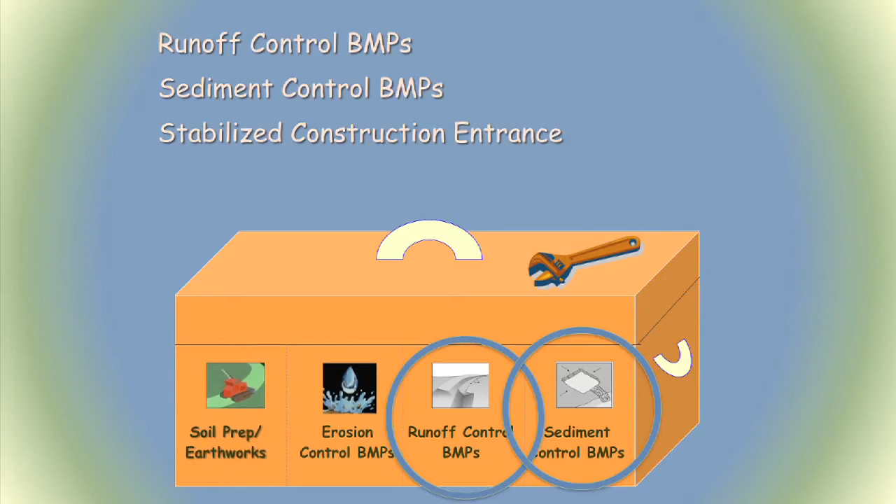Nowhere to run. We're going to talk a little about runoff erosion and maybe a little bit more. So runoff and sediment control, topics that I haven't covered yet.

Remember, runoff erosion is Junior and his gang, and shear stress is how many juniors there are, how thick they are, how much damage they're doing, how much their skateboards weigh, and how fast they're going.

Name some runoff control BMPs - I'll do it for you, I don't work in these areas at all. There are some energy dissipators: rock-lined ditches, overside drains, water bars. I kind of like the environmental opportunities that allow for grass-lined channels and turf reinforced mats.

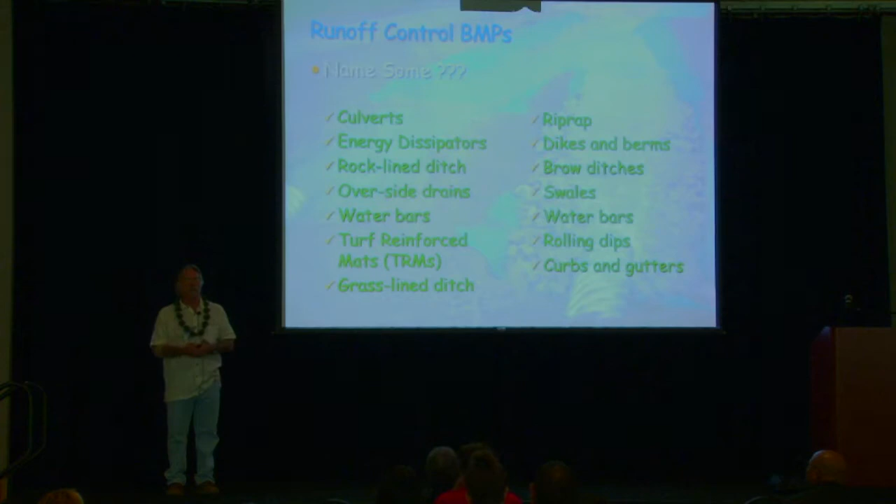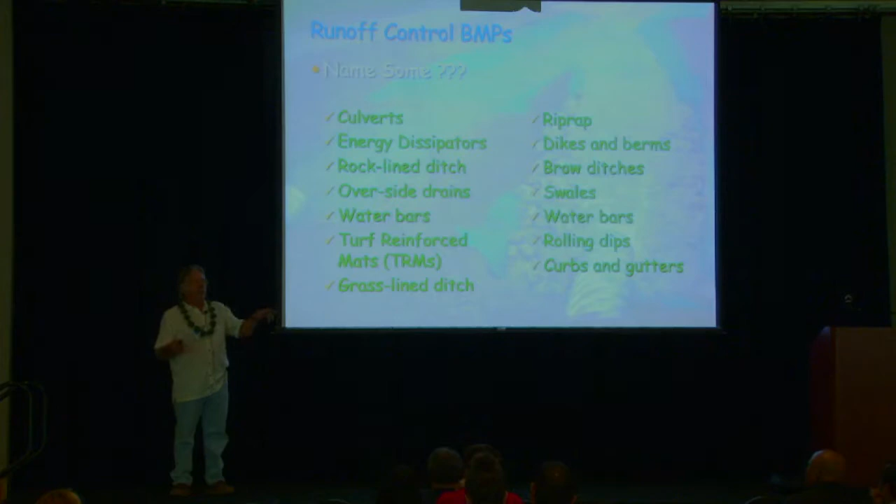I started my work removing logging roads in the Pacific Northwest. There's like 30 miles of logging road per square mile in some of the watersheds I've worked in, which are very steep watersheds. Every tree harvested out of the Northwest had a bulldozer hooked to it to pull it out of the woods, so you can imagine the amount of roads leading to pulling the lumber out, and then they just left the roads. The alterations to the hydrologic hill slope drainage patterns were tremendous, and all of that sediment is being delivered.

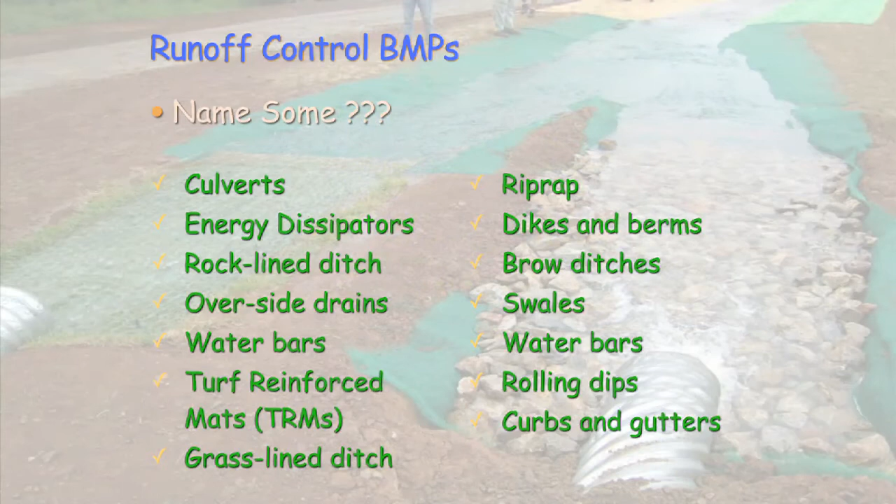Dikes and berms, water bars, rolling dips - I like rolling dips, water bars I don't like. Curbs and gutters, you know, I'd save my plastic on that. But runoff can be very, very serious, as you see here.

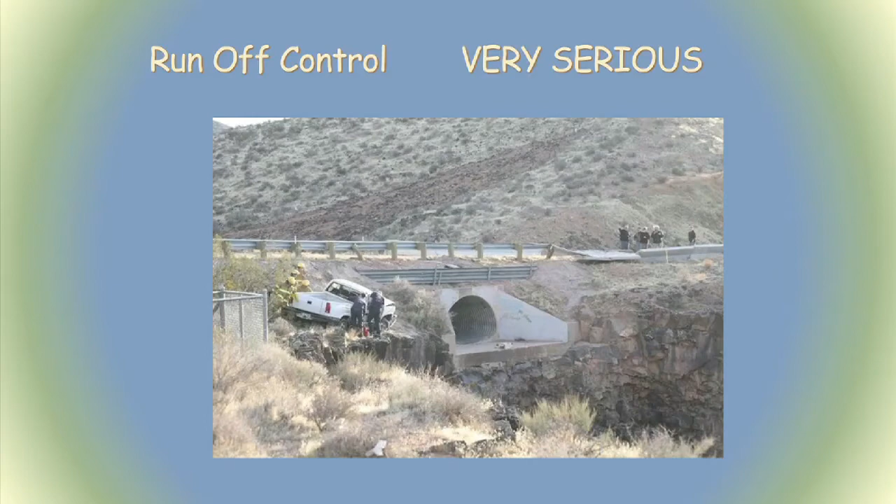I wonder if highway departments build roads like this - this is in New Mexico. They build roads and drain an entire arroyo or whatever, a big giant area, into one culvert. And it's very serious, causes big erosion. Look at that.

Now, I don't know what this is from, to tell you the truth, but look at this guy. He obviously went through - he must have been drunk, maybe not drunk, somehow impaired. Very lucky though. He went through the guardrail, bounced over here, turned out here, and did not turn up down there. It's a good time to go to Reno, huh?

Now, I'm not sure that gully existed before the highway department ever built that box culvert.

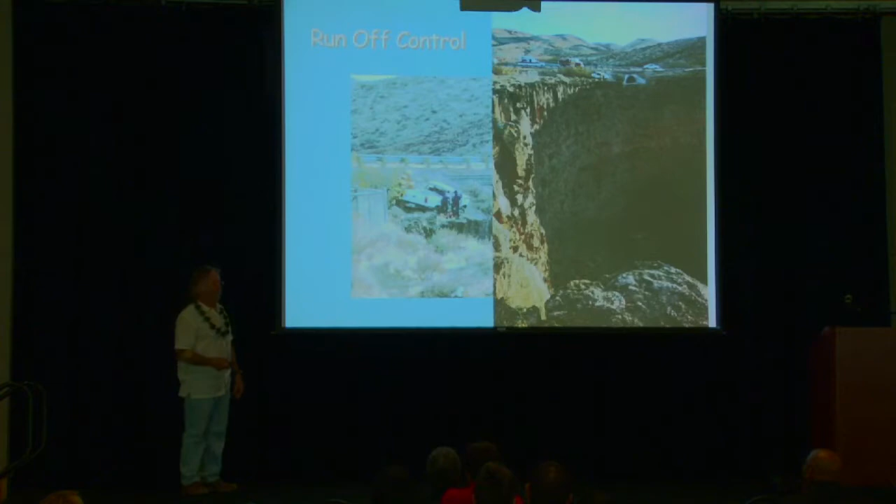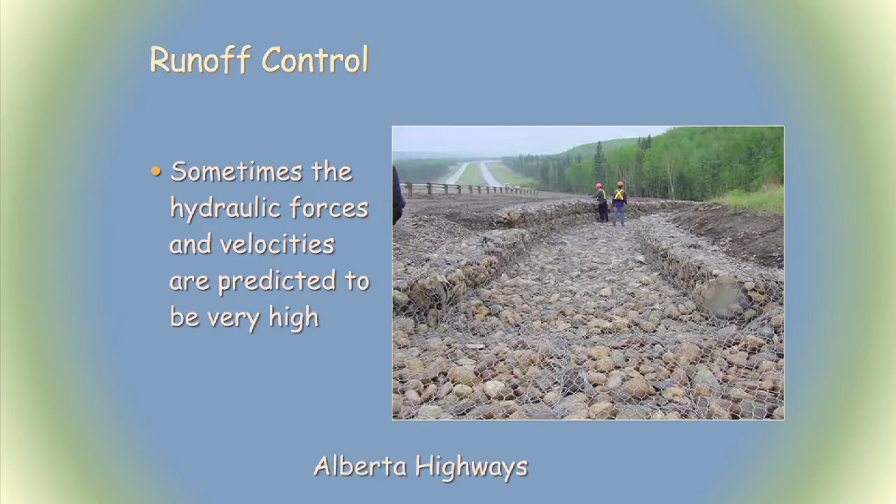Sometimes you have to use gabion baskets, but gabion baskets - these things last, studies have been done, they last 15 years now. There's abrasion and corrosion; they have zinc coating, most of them. If you put the polyplastic coating on them - there you go, plastic again - you get another 7 years out of them. But if they're abraded, they could be failing.

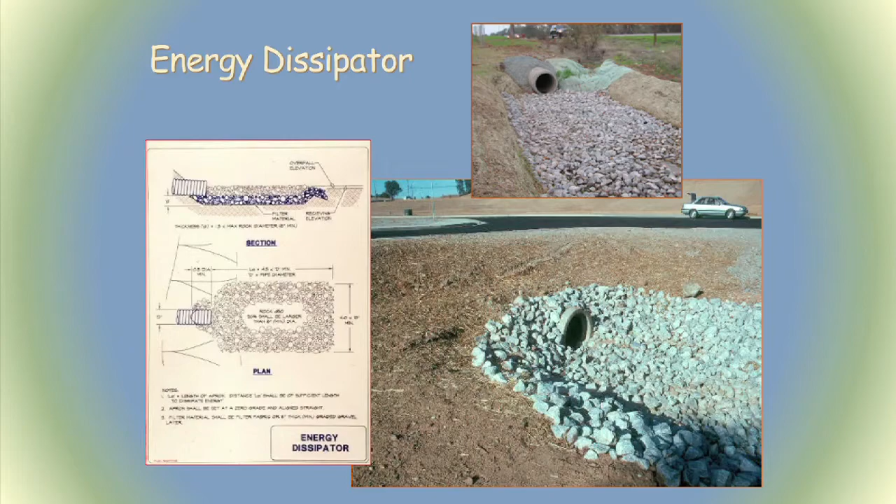You generally use gabions because all you have is little rock and you don't have big rock, so you have to encapsulate the little rock to make it act like a big rock. Overside drains are energy dissipators for the outlets of your pipes. I have an alternative, but it's plastic - it's HDPE. I want to show you that one, it's on this one here.

Nothing like a devil's advocate to make me think. Thank you very much, that was good.

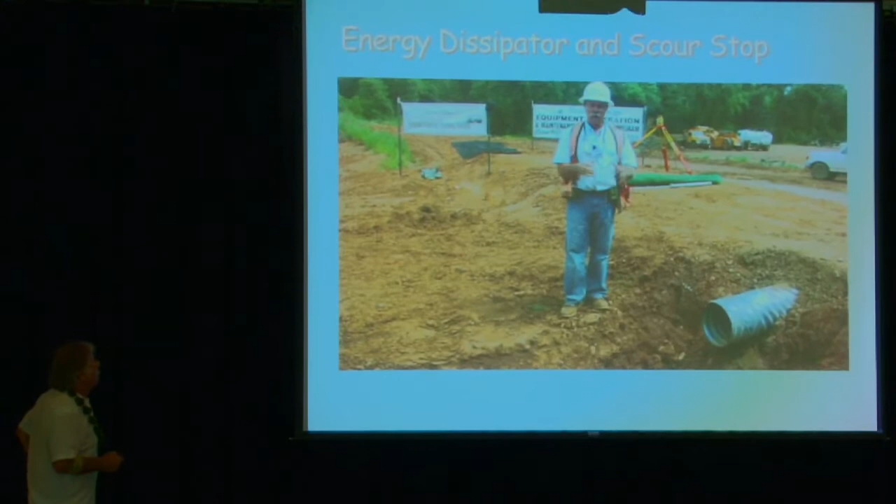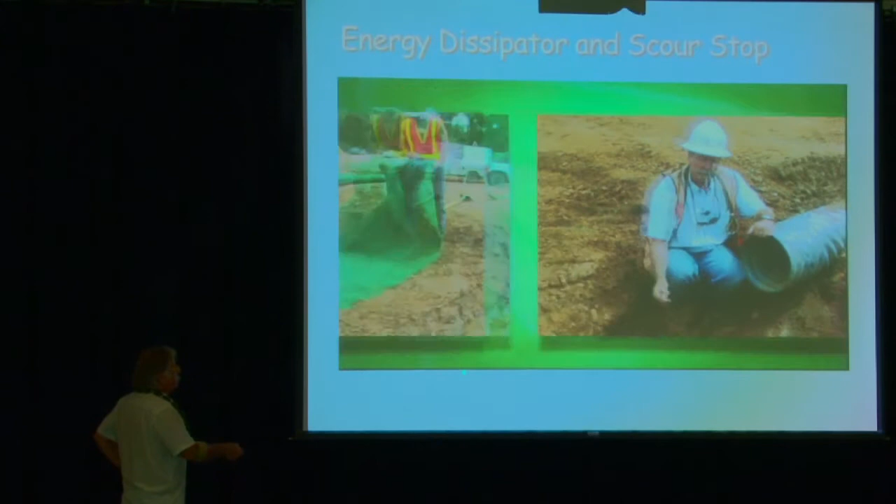By hitting the rock, the rock provides so much roughness. We've excavated down here. We will cover this with a really high strength and permanent turf reinforcement mat, and then we're going to lay our rock apron on here.

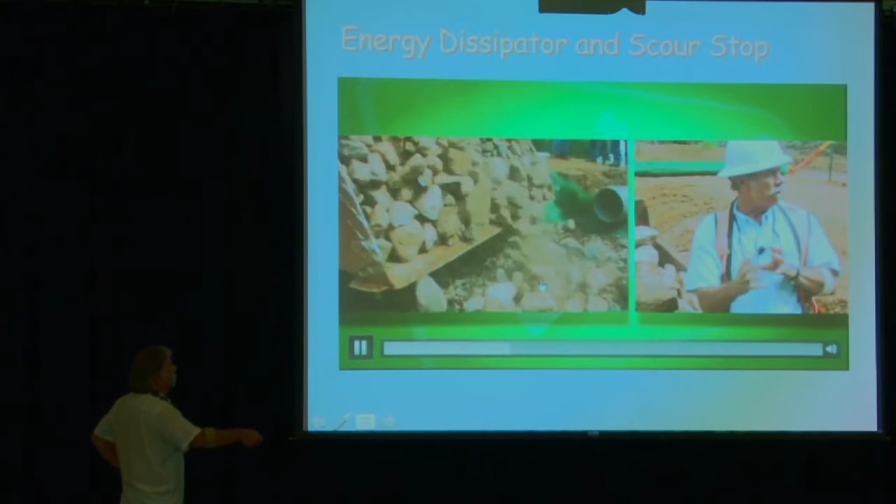Right about here, Matt. Okay, so before we put our rock energy dissipator down, we're filling it with rock, a little bit more. So what we have here is - okay, so it's much stronger. The whole becomes stronger than the individual piece.

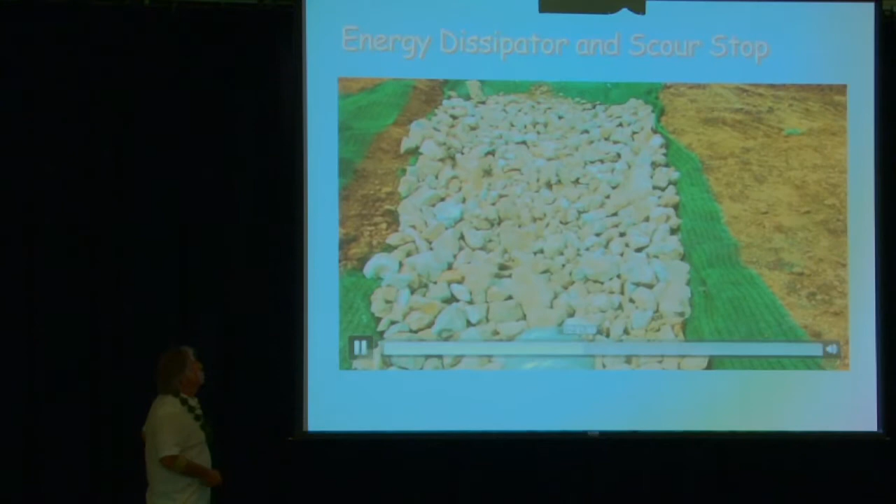The next thing we're going to do is we're going to change gears. So that's a typical energy dissipator, rock with an underlayment to energy transition. The scour stop is made out of...

HDPE, it's a high-density plastic. It's much lighter than concrete. These are very light sheets to put down. They're 4x4 sheets, and we put these down and replace the cement apron.

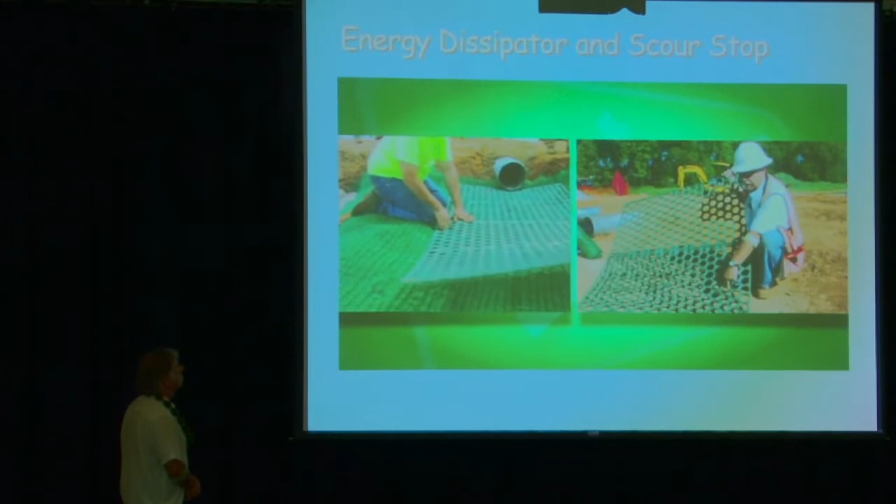The scour stop apron down, and then we just anchor it in place. They have some really cool new patented devices for anchoring these things that make them really, really easy to anchor. Now pause for a second. So, and then you - if you can imagine now, let's put on our post-construction, where's Rich?

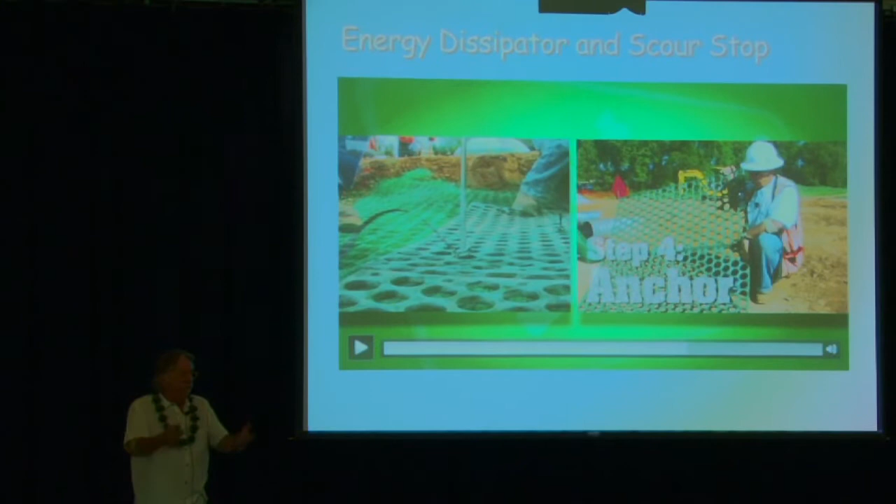Put on our post-construction hats, where we're trying to get more water to infiltrate. We've got enough developments. So what about if you had a ditch, a culvert that drained a subdivision down into an area where we could put a scour stop? What if I decompacted the soil and made the entire ditch capable of handling 20 feet per second at times, while at other times it has low flows and absorbs all the pollutants?

So I dig down, build engineered media for the bottom of the ditch, put the turf reinforcement mat down, then the scour stop, which has been tested at 20 feet per second. It has openings in it, and you grow perennial grasses native to the area with large, long roots. Then it outfalls into an area with a TRM that also has native grasses with deep roots. So during first flushes and low flows, all or a lot of the water will infiltrate - we maintain high infiltration rates, while at the same time having 20 feet per second flowing through. That's what these kinds of techniques allow us to do.

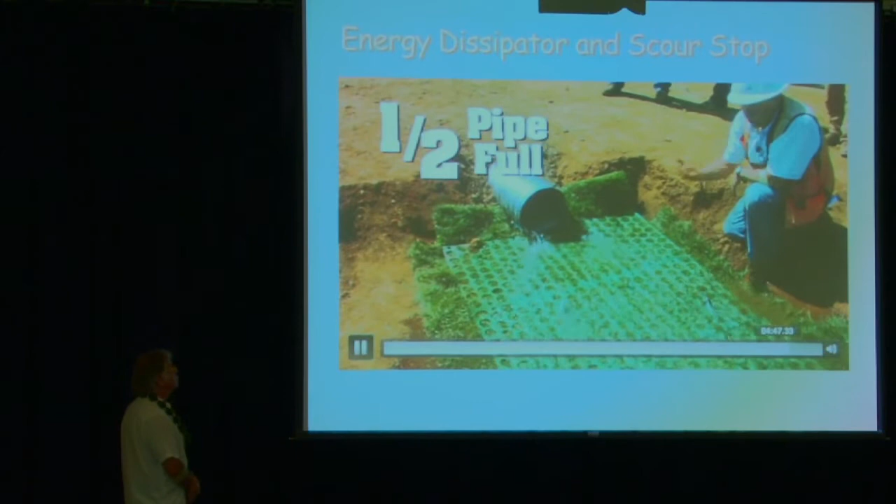Spread out, it's more laminar flow. Give it half, increase the velocity a little bit, see what's going on. Again, there's no real turbulent flow, it's laminar flow. Go ahead and crank this thing all the way open - let's see what we got.

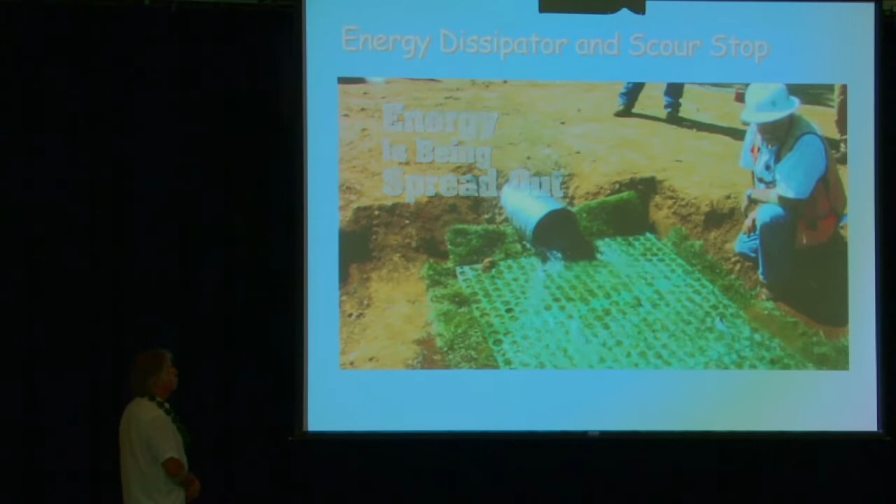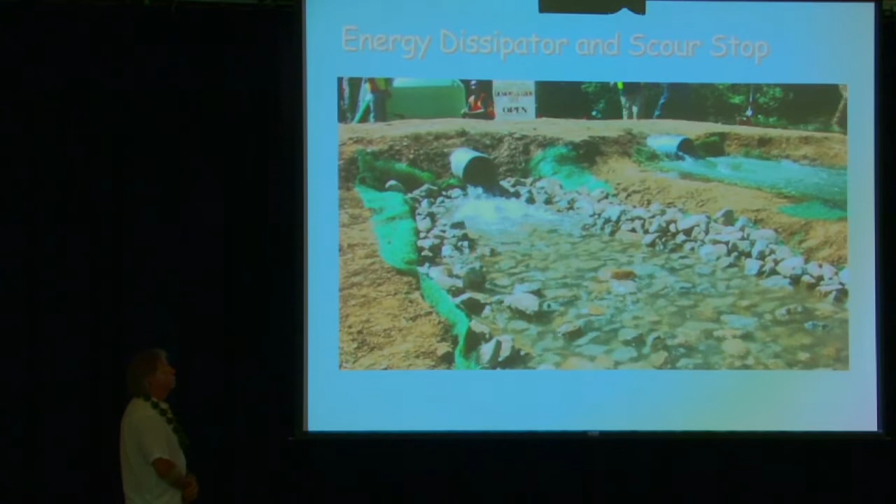Okay, take her back to a half a tank, and let's have a half out of the other one also. Let's run them both side by side. So those are two ways you can do outlets to culverts.

Also, Alberta DOT is using the scour stop as down drains, and again these can be vegetated with native grasses.

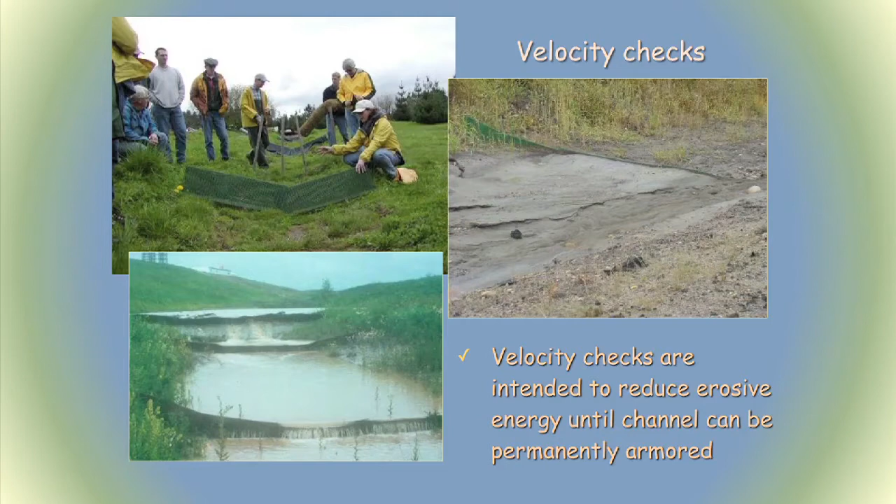Other runoff control - there are velocity checks you can put in ditches to slow the velocity down. But once you build a check dam in a ditch, you're going to have some erosion. Check dams are an anomaly in the stream system, so you want to be very careful that velocity checks are very low to the ground. Here's a shallow, low gradient median strip in Redding with no high velocities anticipated, so they're just using grasses.

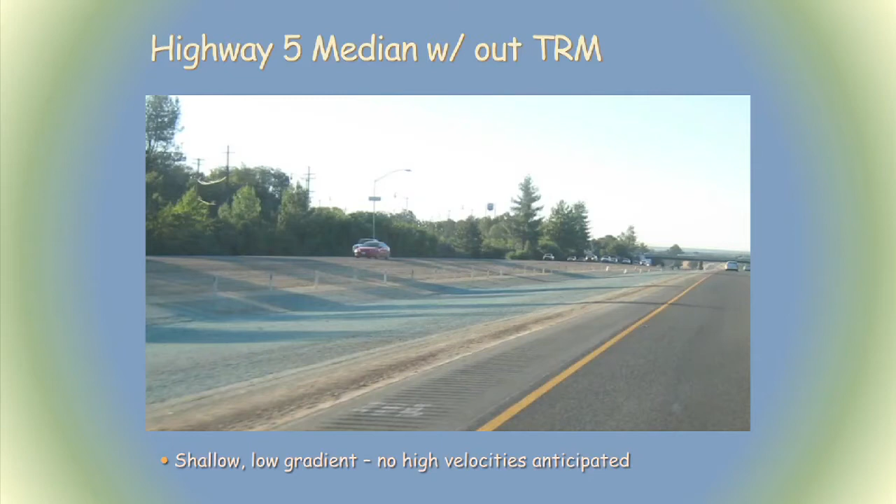This one, I'm sorry, you can't see it - the fiber rolls were used across this ditch and they blew all over. They should have used the rope and twine method to anchor them.

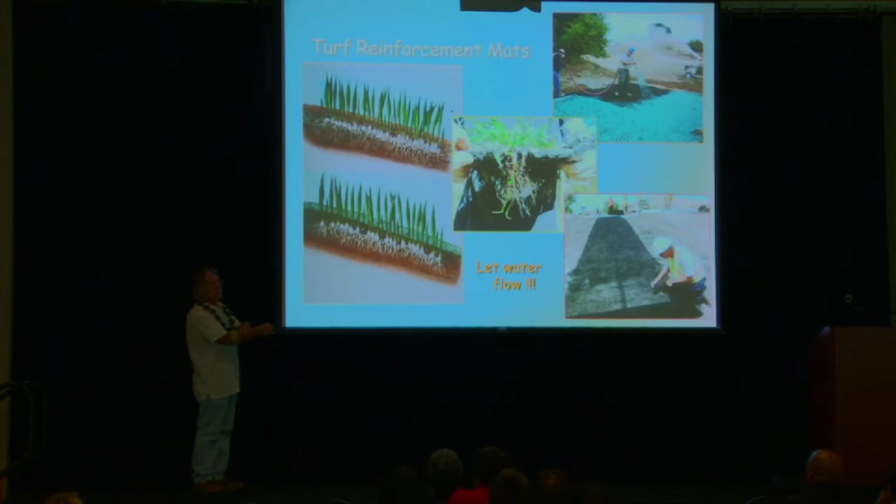So this TRM, the Enkamat right here, we sprayed it down at this off-highway vehicle park, and then I had to remove this piece. This is only 2 months old. So this is the piece that can now withstand 21 feet per second, higher velocity than articulated concrete blocks. At 21 feet per second, articulated concrete blocks start lifting, going through and vibrating, cavitating - and this will last longer than that.

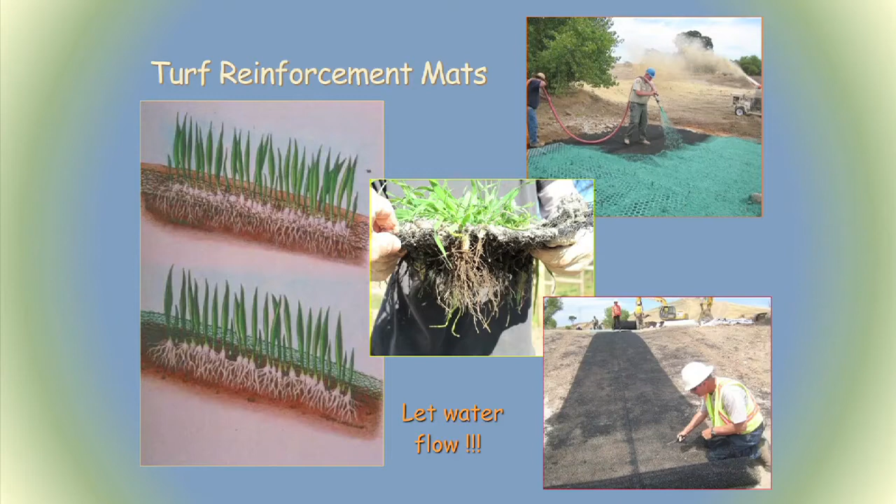So high velocities can be had. Kind of exciting - this is Enkamat back in the day, '94, the first time I ran into it, using native material with it.

So the idea with a lot of TRMs is you want to use them until you can get the grass to grow, right? You don't want the ditch eroding until the grass gets established, so you need something to protect the ditch. Do you need to use plastics? No, there are biodegradable materials now.

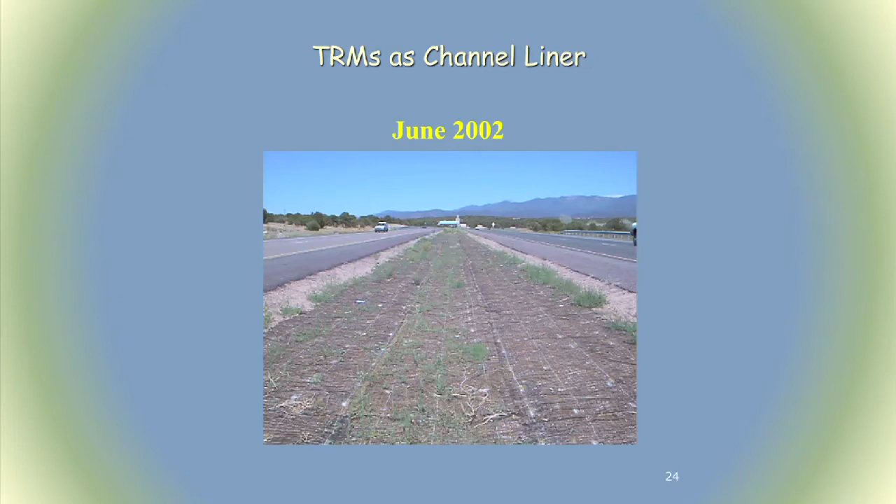Here's a median strip. This one isn't using a biodegradable - this actually is coconut, but the netting is plastic. But then the vegetation grows and you're done.

I told you already, when you put your TRMs in, make sure that at 20 feet you have a check slot or a double row of staples. That's critical to have these things working properly.

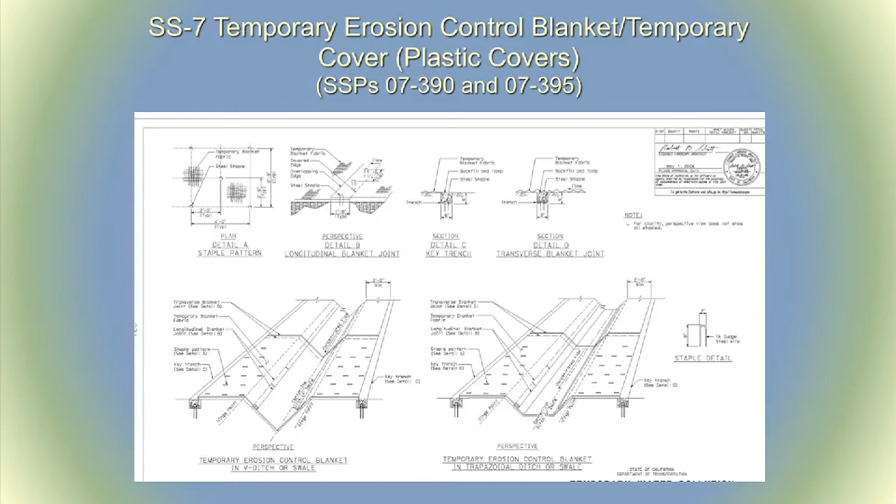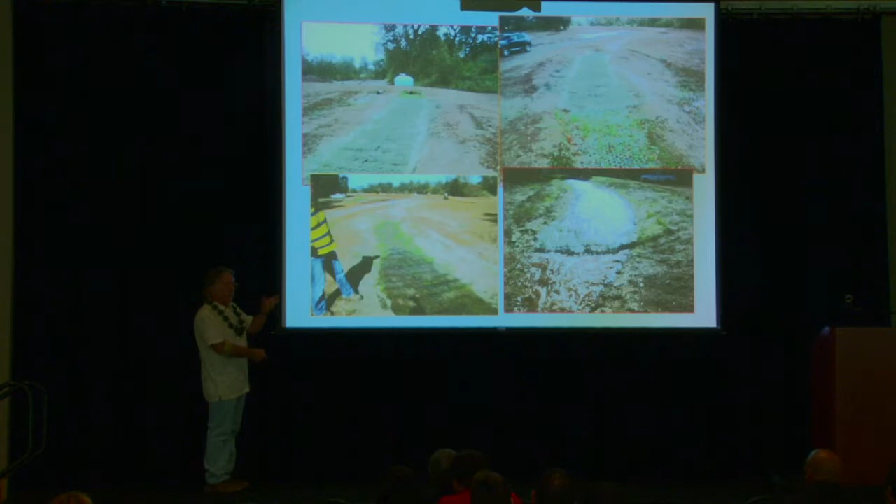You can see where the protection - I told you I lined the ditch to be fair at Shasta College. We had a very hard clay soil, and to make it look right I put 6 inches of decomposed granite, highly permeable, with a maximum permissible velocity of 2 feet per second. So once it exceeds 2 feet per second, it erodes. And yet we were able to protect even that granite with the blanket. This is where the protection stopped, and it eroded the 6 inches of granite.

Articulated concrete blocks. In my community, instead of having culverts, we've been doing some of our stormwater practices as removing culverts and going back and doing areas that can receive more stormwater. So these are post-construction BMPs.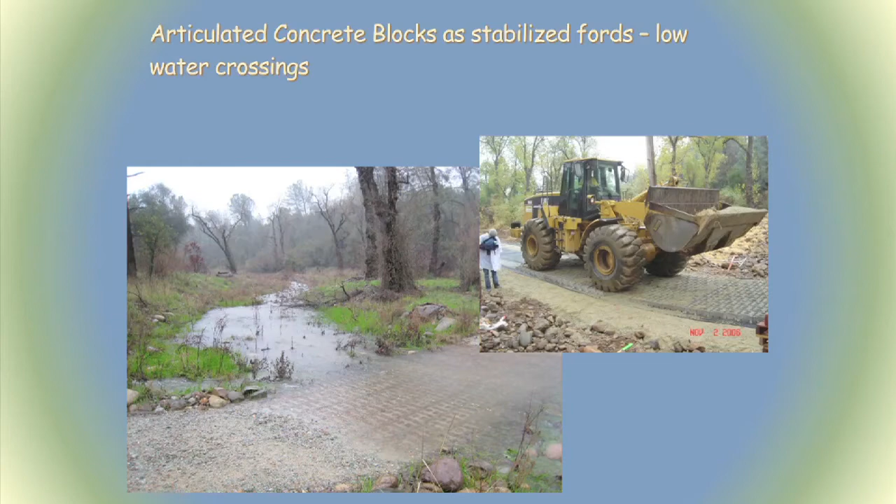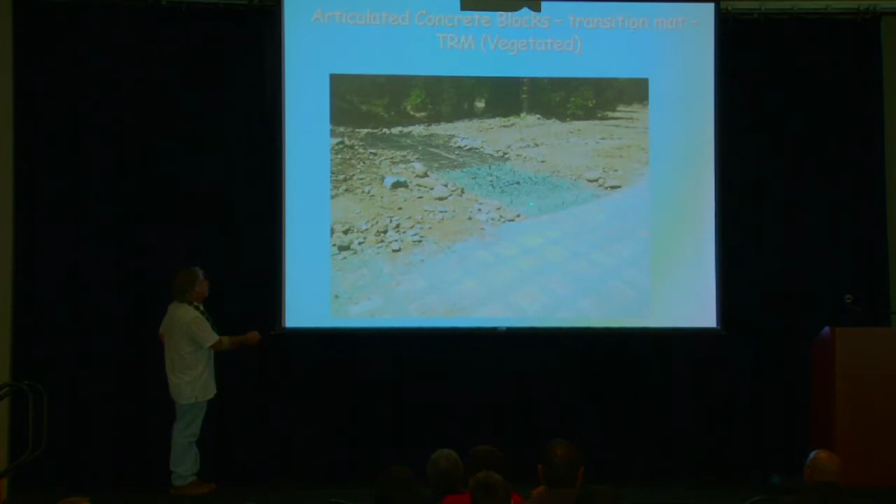Here's one where I replaced a culvert with an articulated concrete block, draining so water can go in between the blocks. It can go on the Enkamat and then the scour stop, and then we have Enkamat with native grasses. And that's the way it looked when it was built.

And then it withstood several high flows. It withstood that high, 8 inches in 4 hours of flow. Look at that. And after that big flood, it's still in place. We have native grasses now holding everything together. This is 7 years later, and that's still in place.

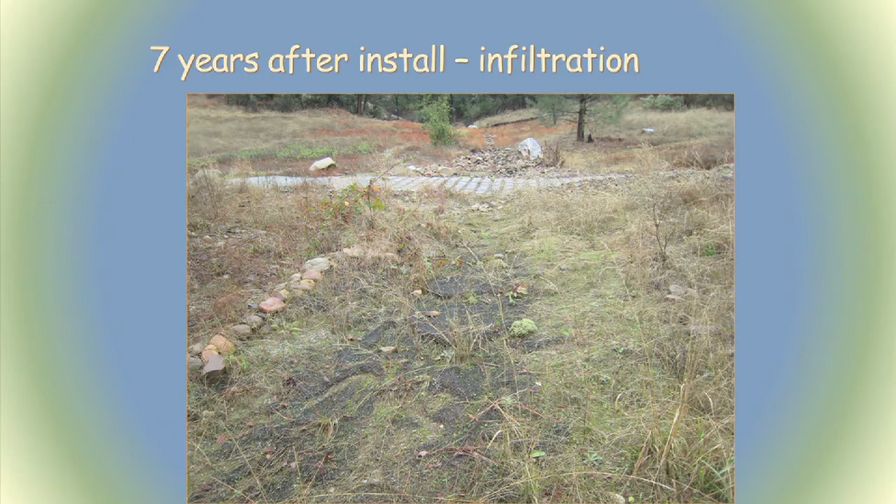Let's talk about sediment control BMPs a little bit. Are you all familiar with Stokes' Law? Anybody raise your hand if you know Stokes' Law. Stokes' Law says that sediment will settle out of suspension based on its density, particle size, and the temperature of the water.

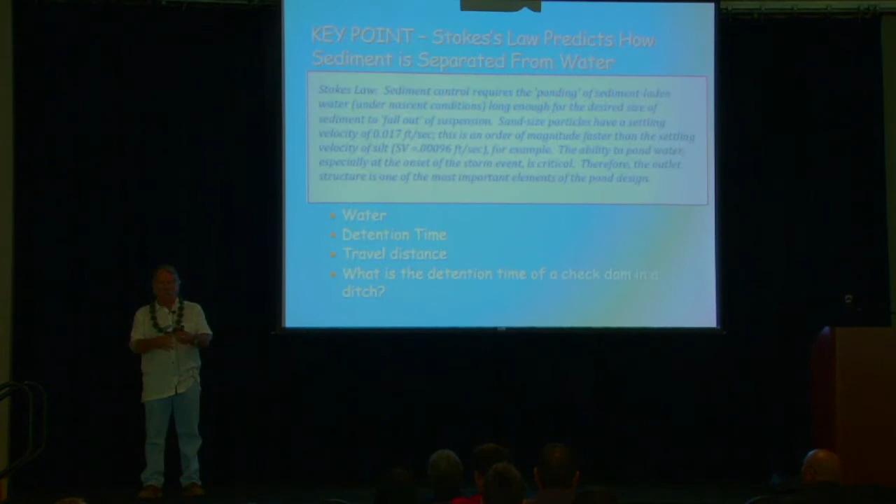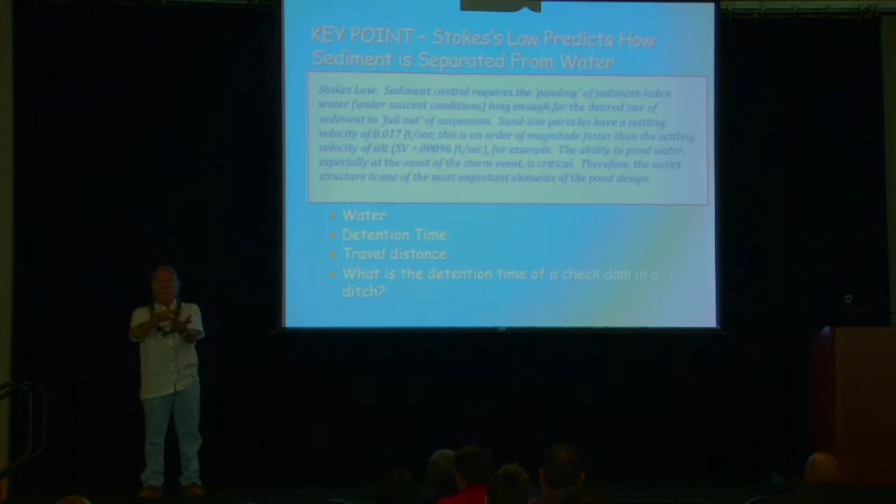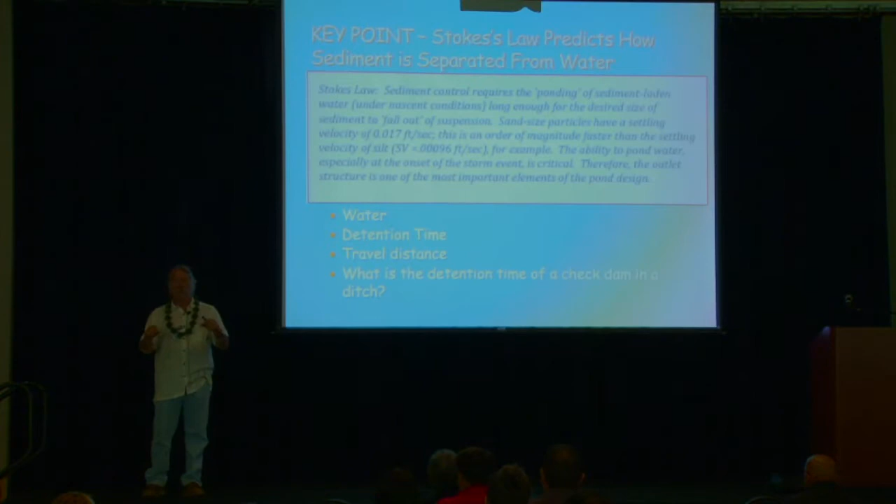So if I had a little water bottle here and I put some dirty dirt in it, added water, shook it up and set it down, what's the first thing that's going to fall out of suspension? Sand, then maybe after an hour or so, silt, and maybe never clay. It depends on which kind of clay. Some clay particles actually have a negative charge, so when they come in contact with each other, they repel each other. They're like two negative ends of a battery. They repel each other, and those are the ones where maybe we need some flocculants.

But the critical thing is it doesn't say anything about filtering. It says that you need a pond. So if you're really going to do sediment control, you need water in your pond, and it needs to settle out. You need water, you need detention time, you need a travel distance.

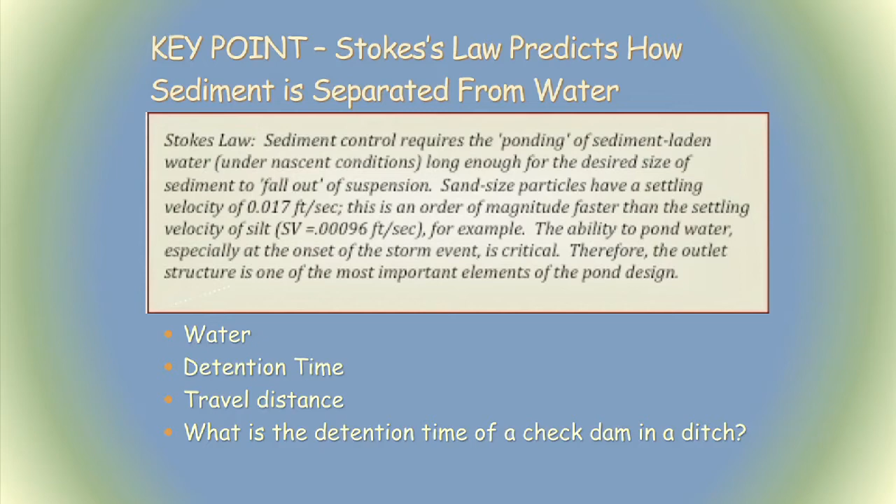So, say you had a curb, and you had two gravel bags in the curb, and muddy water's running during the storm, muddy water's running down the curb. What's the detention time of the water behind those gravel bags? And how effective are they?

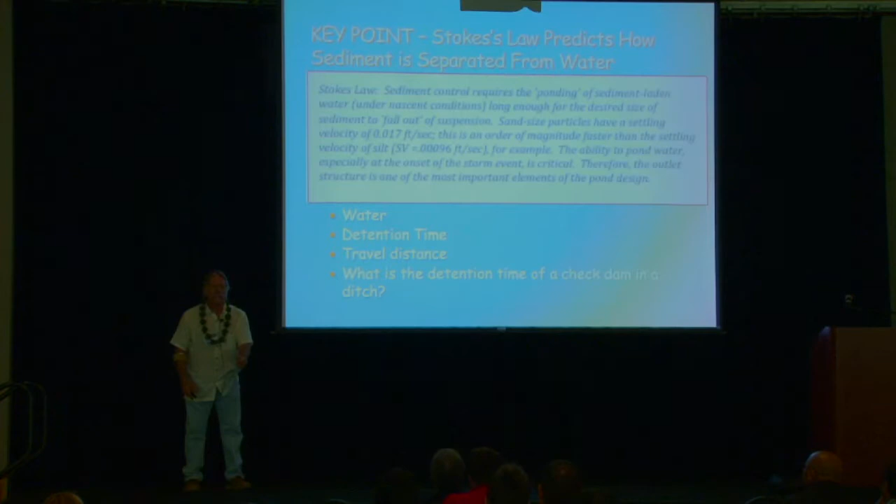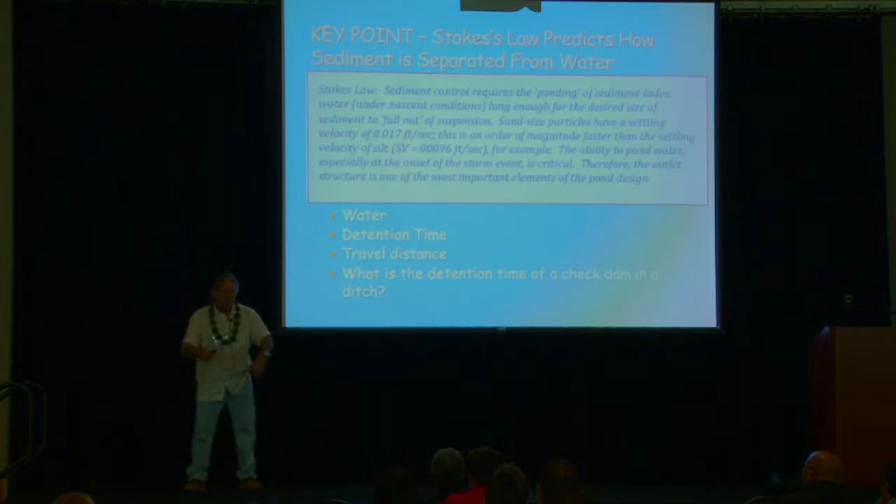During the storm event, at the peak of the hydrograph, it's rising, and now it's flowing full speed. That sediment is going in there and it's going out just as fast as it comes in. But maybe on Saturday morning you come by, and at the tail end of the hydrograph, the last little bit can't get by and it traps it.

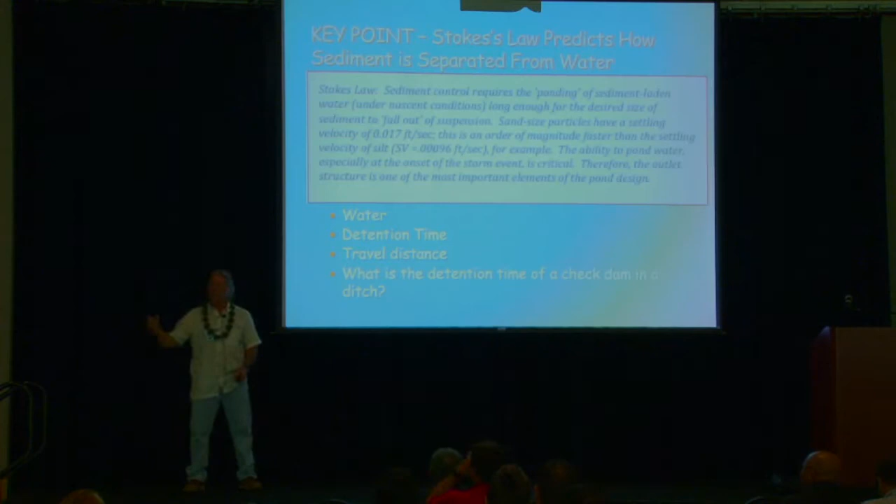So you get a shovelful after the storm is all done, and you go, wow, these things work great. I get a shovelful here, a shovelful there. But what you didn't know is that you had 100 or 1,000 cubic yards going through the system, and you didn't know it was there.

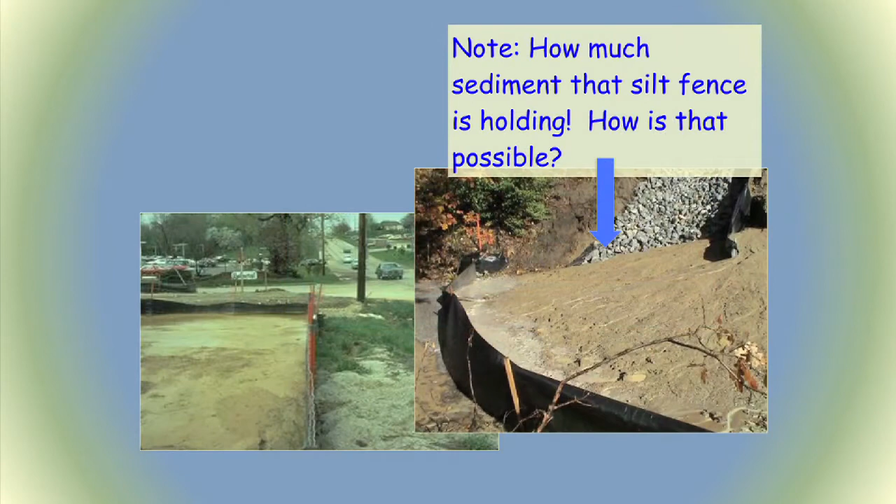Silt fence with a catenary curve versus a silt fence that went around the perimeter of one acre, directing all the water into one acre. Would you ever design for me a sediment pond that held one acre where the embankment was made out of sticks and cloth? It's silly when you think about it.

We could have taken a bunch of catenary curves here and trapped this in a bunch of different spots, using even less silt fence, if we'd just done a couple of these kinds of things. And we directed all the water to the low point of the site, where there's a storm drain right there.

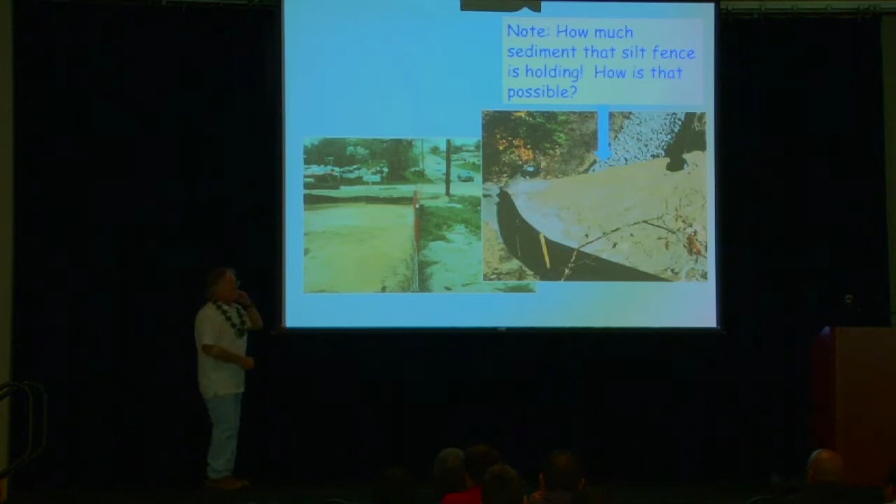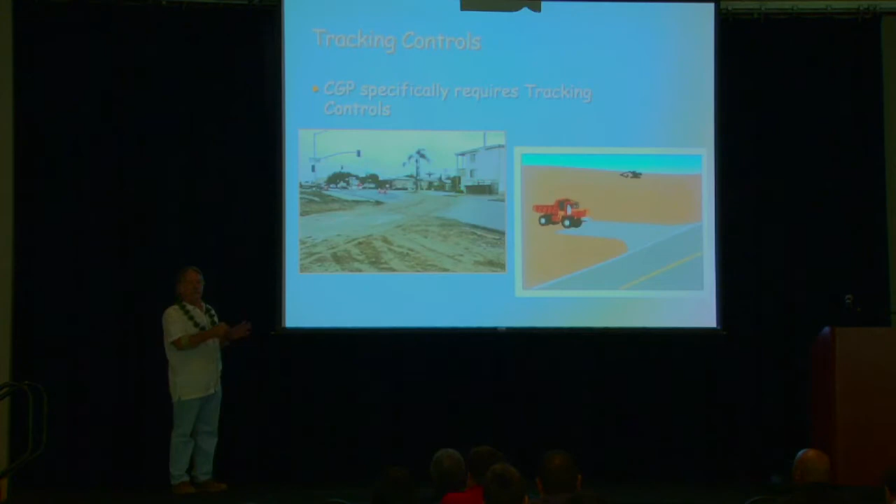A little bit about tracking controls. I said I would talk about it. Are tracking controls important here? Are you having to do tracking controls? Yeah, okay. So basically what we have for tracking controls, and you probably already know it, is we have a rock apron, or we have nothing. And that's a good way to get called, because the Clean Water Act just loves to act on complaints, and that's a good way to get Aunt Josephine and Uncle Bob to call in when you leave mud on their road, and then it turns to dust in the sunny afternoon. So we've got to do something.

A 50-foot rock apron is one way of doing it. My experience has been with a 20-foot rock apron, and it could work if the rocks are angular enough. It's tricky, they have to be angular. If you get a lot of 6-inch rocks, they can get caught between the dualies of the truck and get tossed out on the roadway. So you need a lot of 4-inch angular rock. I tried it with subangular rock and it didn't work very well.

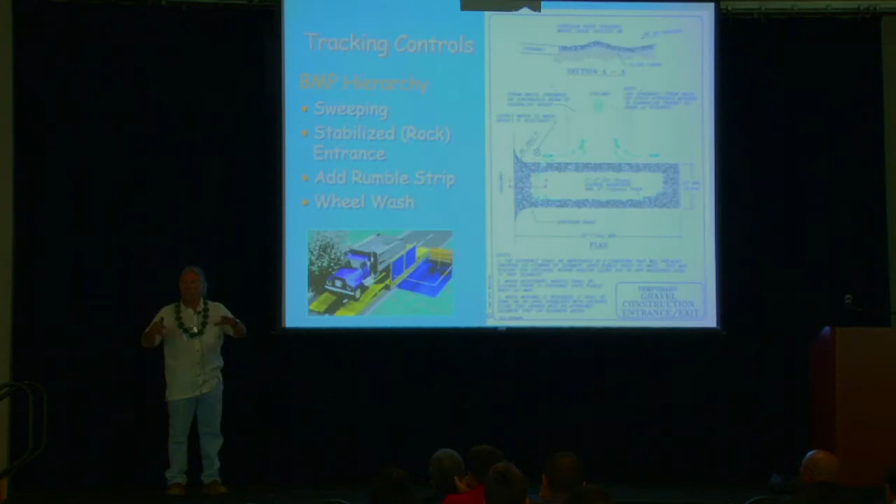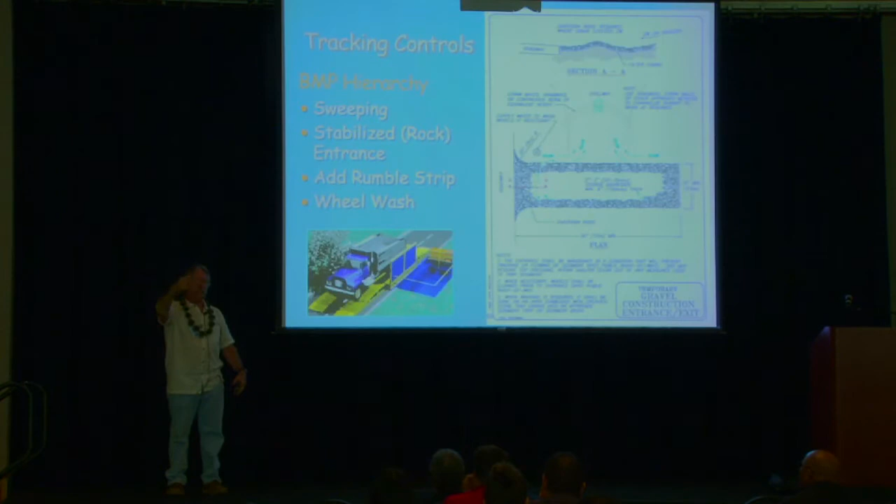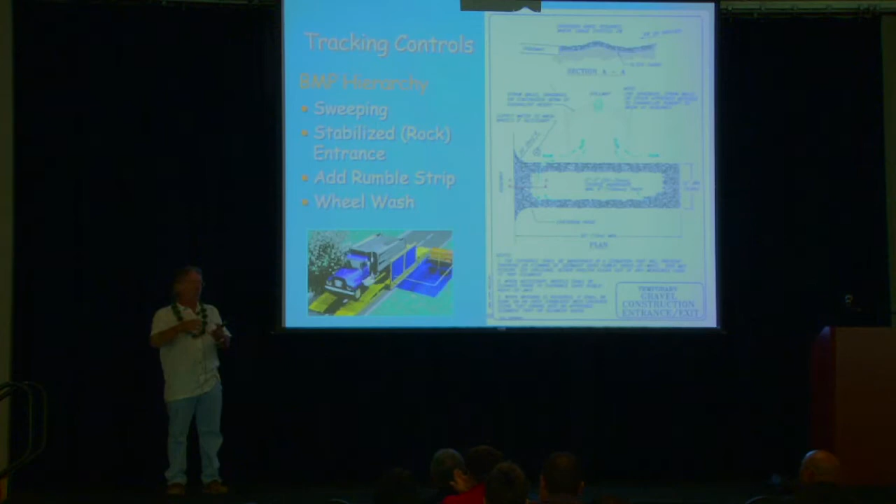What I like to do, and Caltrans has found this too, is the contractor lays the geotextile down, lays 6 inches of rock down, and it doesn't take long for that to get filled with mud. Then what do you do once it's filled with mud? You go back to the highway department and say I need another one, and you're paying $1,100 to build it. So where does all that plastic and rock go? They have to haul the old dirty one off to the landfill.

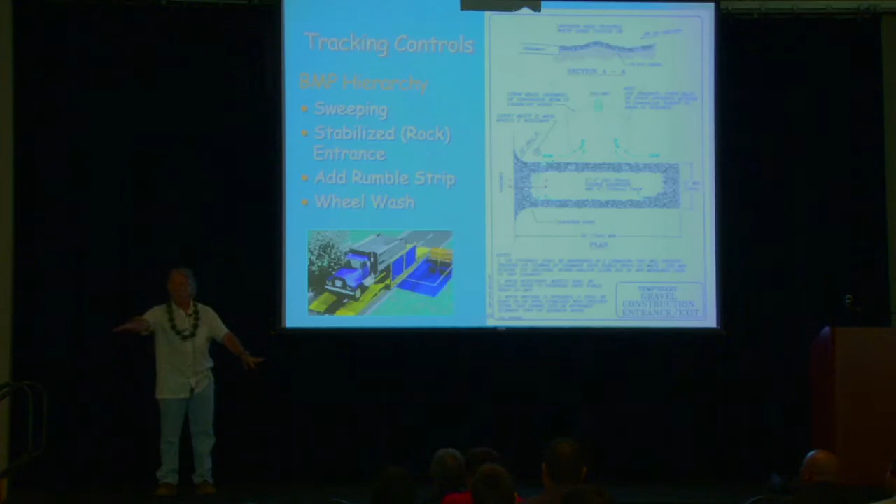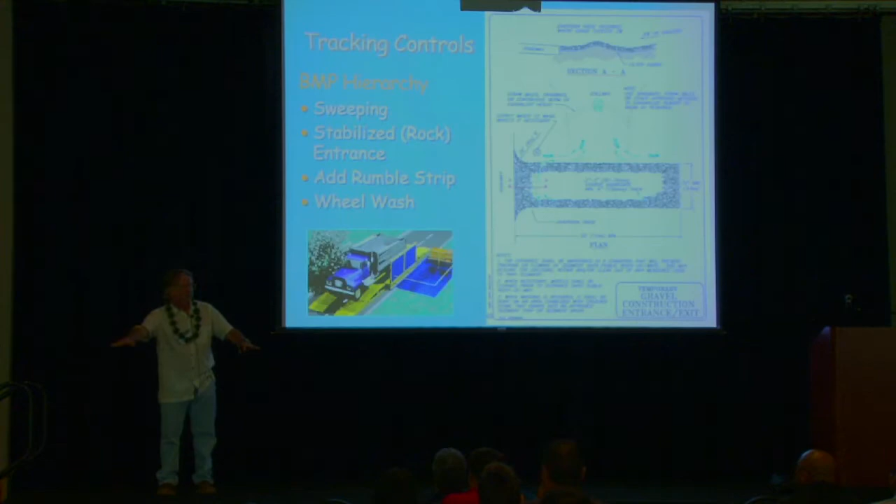So what I'm saying is: if you want to be environmentally sensitive, follow the specs that they actually have on these things. Make sure your contractor digs down 6 to 12 inches into the subgrade, and make sure your subgrade drains to a point that's not the road or not critical. Then you put your geotextile down. If a storm comes, it drains out through the geotextile. Then you fill it with 12 inches of rock, or 6 inches of rock, and use it. When a storm comes, it washes the rock and drains off into a place.

You can direct that drainage into a small sediment pond. You can use Filtrexx socks, build a little embankment, or use silt fence—you have your own little sediment pond there. Now, it gets plugged up really bad, so you park on it with a water truck and wash it out the drain, and then you reuse it.

Don't pay $1,100 for the second one. There's no incentive for the contractor to make these things work if you're going to pay for the second one, the third one, and the fourth one. If the rock doesn't work, you bump it up a level—you should always have sweeping available—and then you bump it up, you put a rumble strip on it. The same thing goes with the rumble strip.

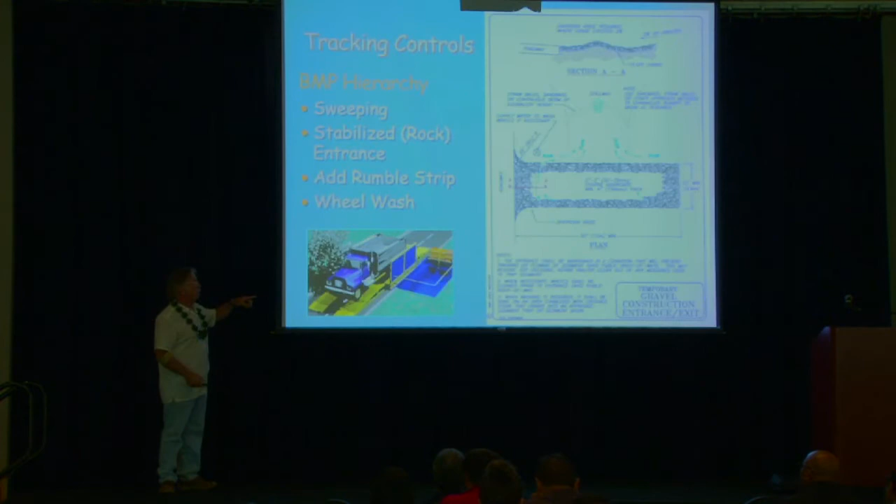You want the strip on an angle so they drain and wash off into an area you have some control over. And if the rumble strips don't work, then you have to do the wheel wash? Caltrans had to do these on some really critical sites down in Orange County, and that could be really costly.

So there's a rumble strip, draining off into that area—we'll hope that's some kind of drain area. A little piece of rumble strip like that might not do much, but you can see where it drains off to over here.

You want to play this video? And I'll have you fast forward as we go through. How much time do I have? Five? Okay.

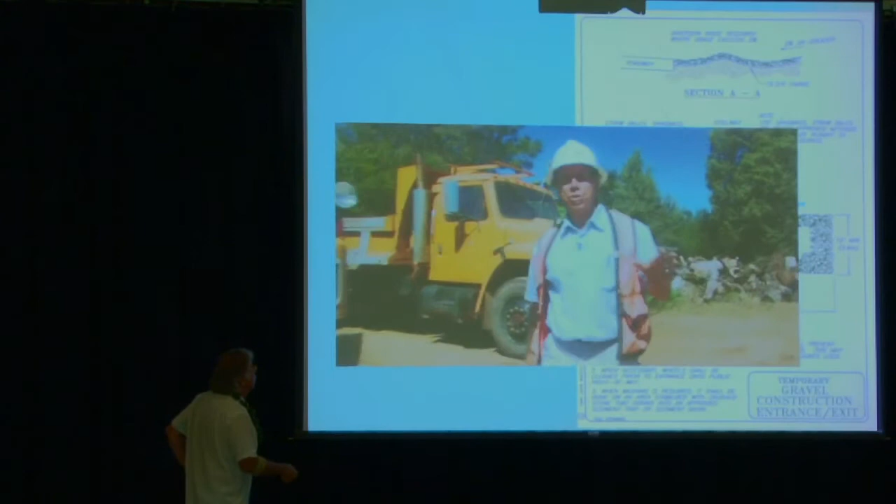We're going to build one in Shasta College. Today's episode is stabilized construction entrances, required on most construction sites. Today we're going to learn how to build one. You drive into the pond to wash the tires, then drive up onto the rock to drip dry them.

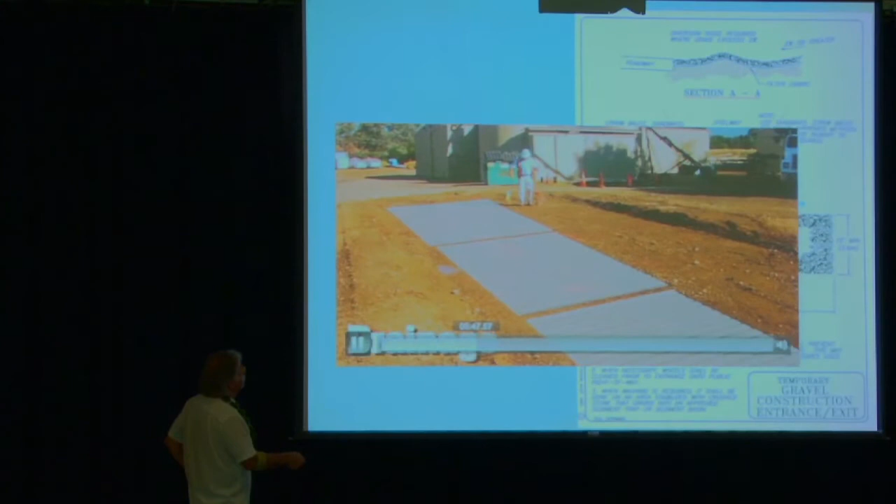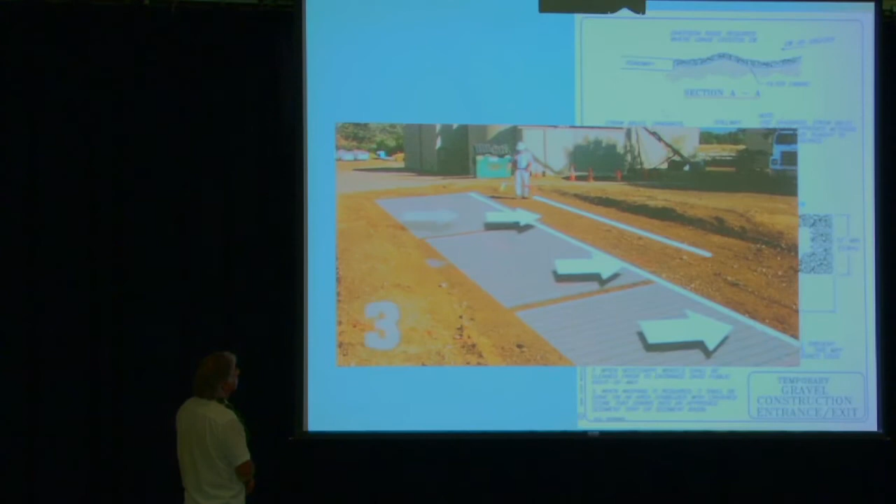Now, particularly from this point, this rock and anything falling off onto the rock will drain that way through the rock and under the rumble strip. But right in here particularly, the rumble strips are going to be draining this way, and they'll be picked up into about a 3-foot wide drainage channel.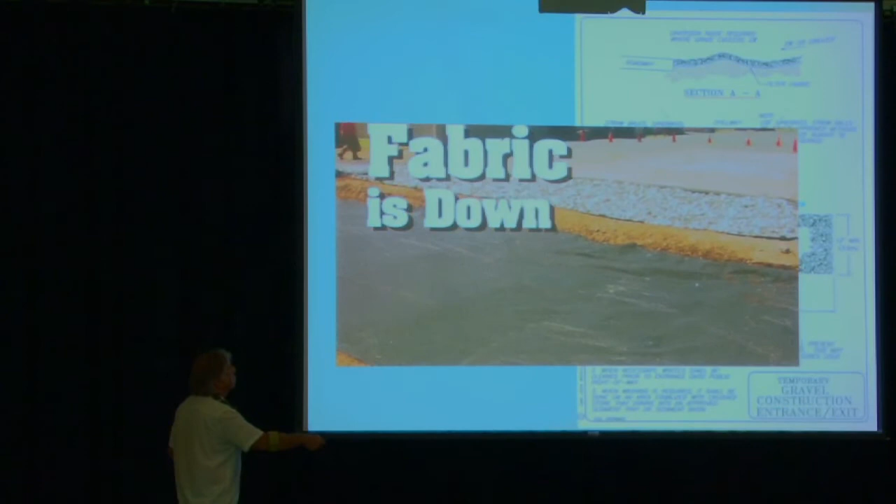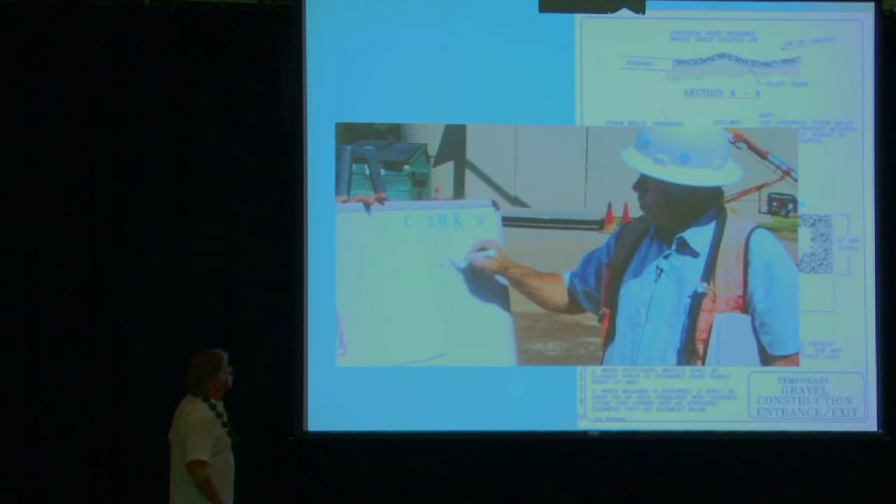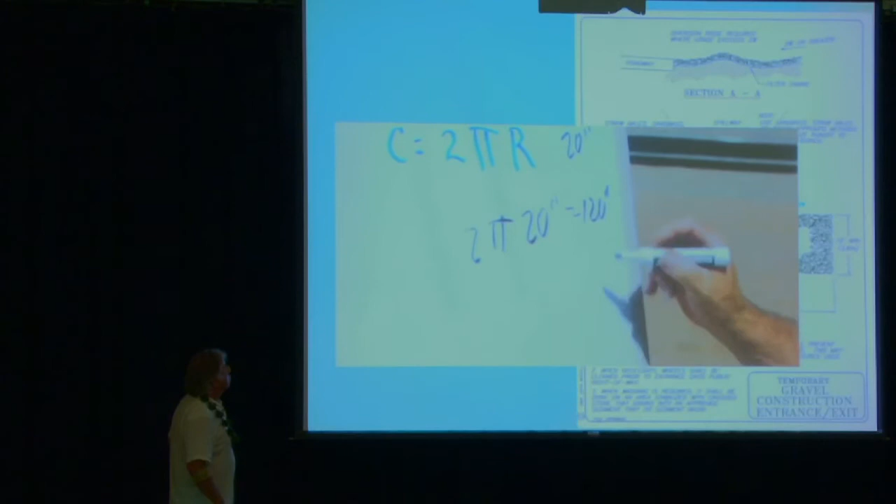So the radius of a typical tire is 20 inches. They're 40 inches high, so that radius equals 20 inches. So now we have 2 times pi times radius, 20 inches. That's the same as 3 point... 2 times 3 is 6, 120 inches. That's the same as 10 feet. 120 inches equals 10 feet.

So it's all going to drain down into here, and we'll keep it on site. Let's watch it run down here, Adam.

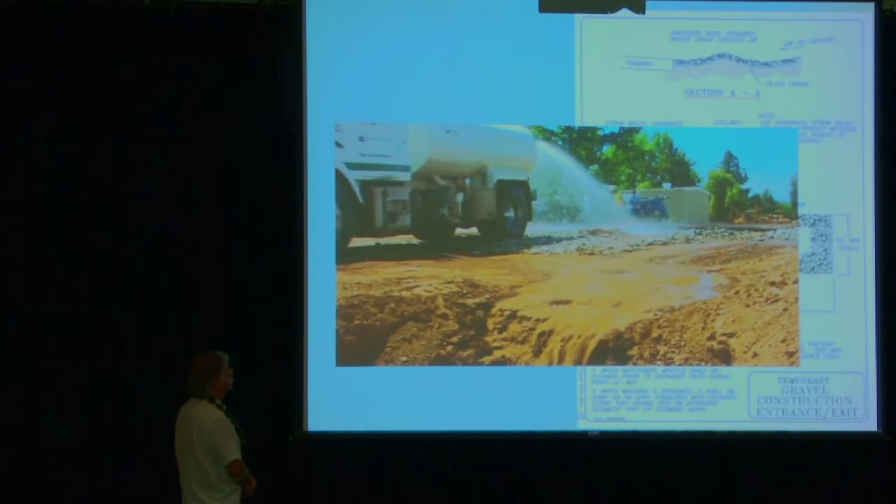Okay, we got our sediment trap in place. We're all ready, here we go. We're going to stabilize the construction entrance with a bunch of water, and then we're going to play in the mud here. We're going to get that thing all muddy and then running down into our sediment trap right here.

You know what I'm really excited about is all that subsurface drainage work we did is really paying off. Underneath the rumble strip here, we've got it filled with water now, and it's draining down into the sediment pond. So you can see these truly are going to be self-cleaning. They're not going to fill up with mud. We're going to be able to wash these guys.

Okay, that's the point I wanted to make.

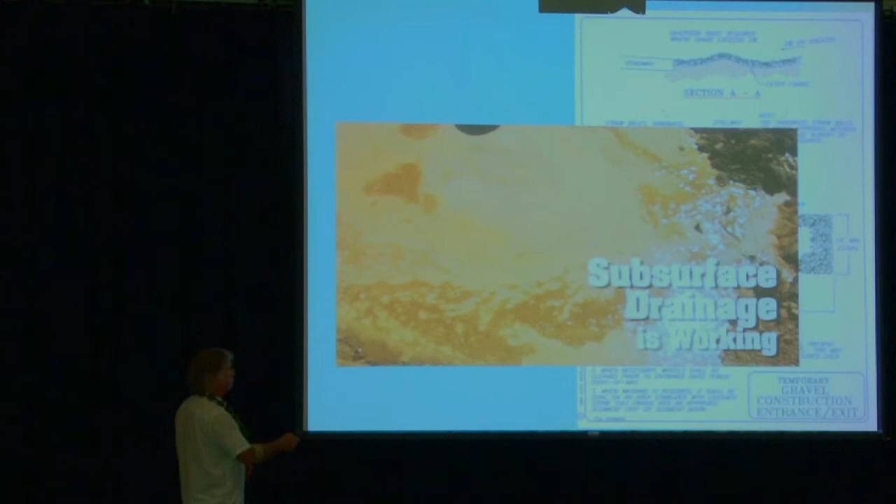I'm not going to say much about curb inlet protection, although with Caltrans we spent a lot of time developing what they wanted to see used. They even made orange bags. Now these are woven, and now they've decided to go to non-woven bags. They're filled with about 35 pounds of clean gravel.

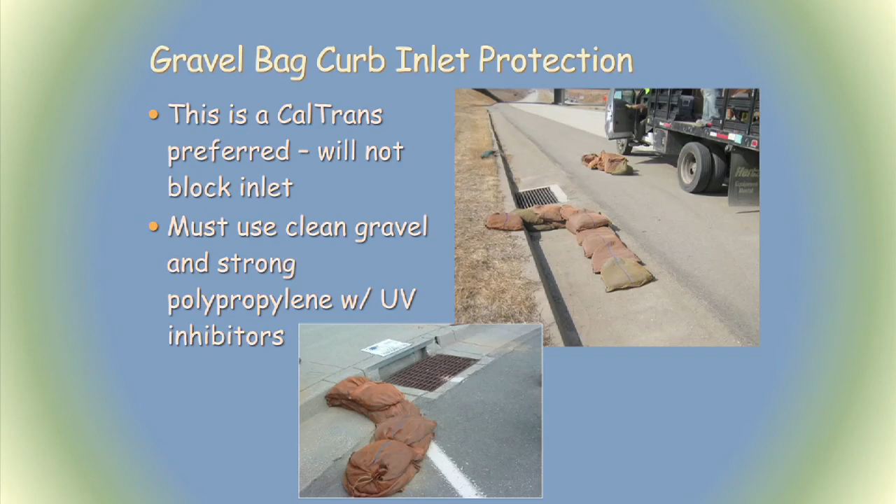In Southern California, a lot of times they use sandbags. They put the sandbags right in front of a storm inlet. Sand is the most deleterious substance you could put in a stream system. And so you're putting these sandbags, white polypropylene plastic bags, that break down in 60 days. And you're putting sand in there, you might as well be dumping dump trucks right in the creeks.

Anyway, so this is the way I would recommend doing it. You build it so you don't plug up the storm drain. Storm drains are supposed to pass water. So you build it like this, with a spillway right here. The sediment-laden water comes down, circles, does a little dance, ponds right here, goes over the spillway, sheet flows over and goes in. That's about as good as it can get.

And everything is visible, you can see when they need maintenance. They're not sticking out in the street, they're just like that. That one, the spillway is wrong, the spillway should be back up in here. And fill those with gravel bags.

The next thing I want to talk about is the sediment pond. How many minutes do I have? No minutes, okay. In New Zealand, they use skimmers.

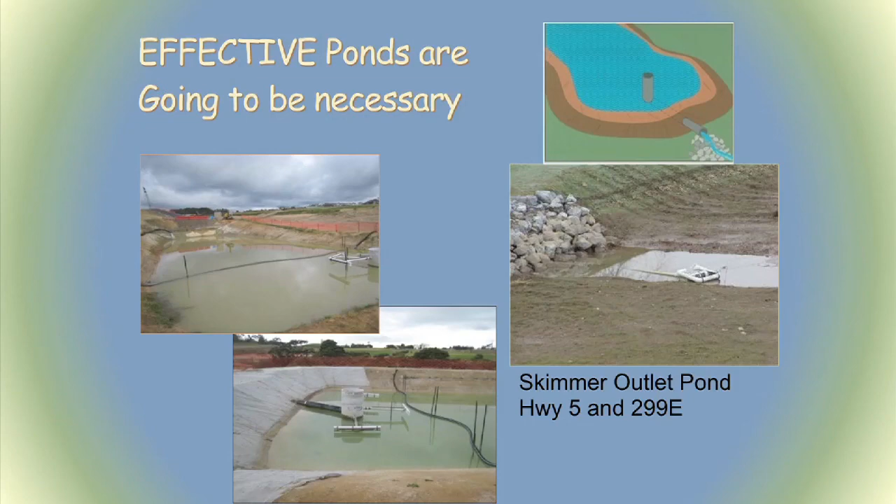They use what's called decanters. We have what's called now a skimmer outlet, so that pond will actually fill up with water. Let me show you a pond here, this is along the side of a highway, so the water comes down the ditch right here. The silt fence is a baffle. The water has to go through the baffle.

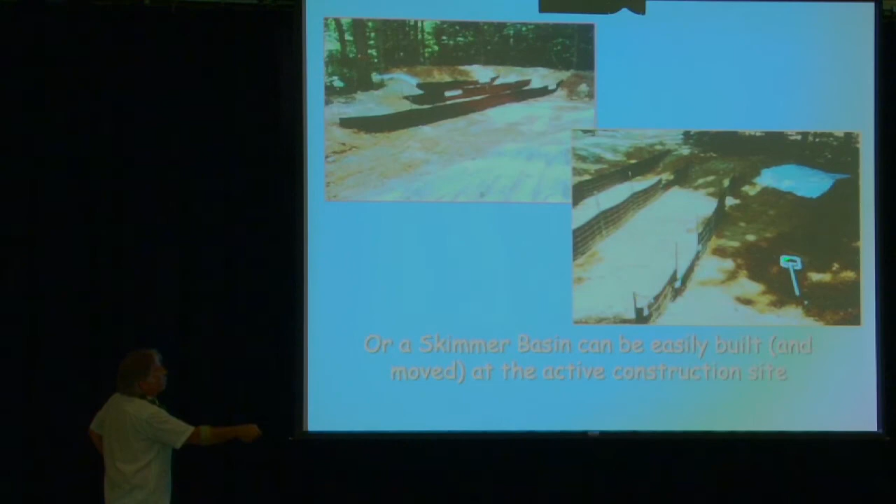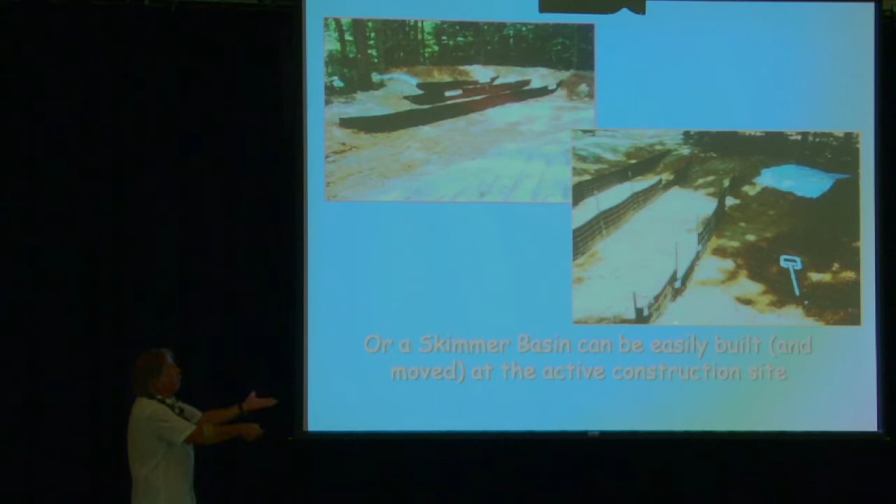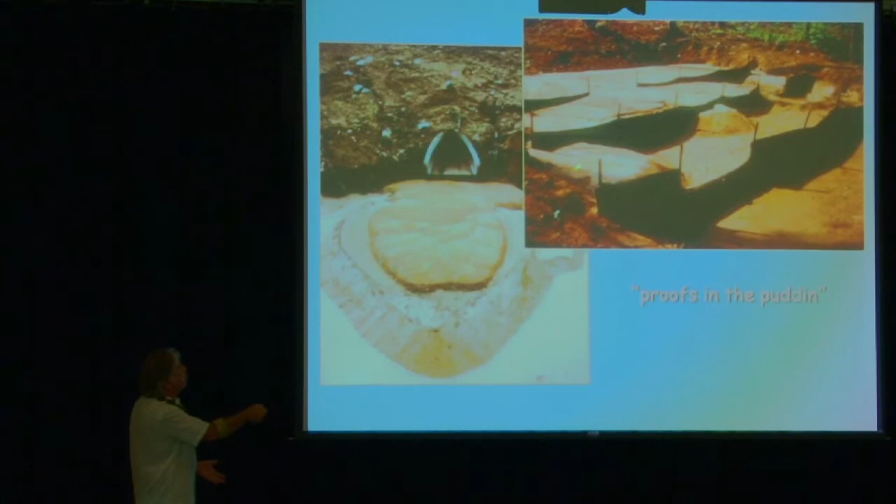This skimmer has a little tiny orifice in it, I could put a half-inch orifice in it, so all the water, when the storm comes, it can't run through the skimmer, so the skimmer floats to the top of the surface. I can design it so that pond holds water for 24 to 48 hours. It's already flowed a long way. As soon as the water comes, this pond is filled with water, and a lot of times the sediment just falls in the first 2 chambers. You can see how it falls in the chambers. When you can get this kind of deposition, you know they're working well.

Okay, so the Faircloth, and there's another skimmer now. Skimmer devices are the way to make small ponds work. All right, any questions?